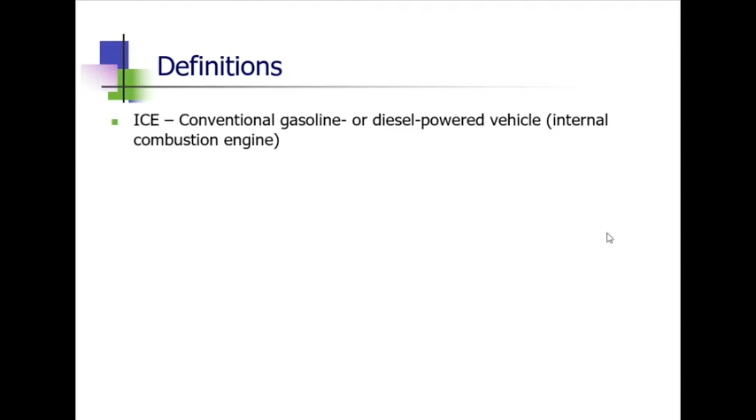The first definition is what we call ICE, internal combustion engine, and that essentially refers to the vehicles that we're all familiar with now, either gasoline or diesel powered. A hybrid vehicle is one that has both an internal combustion engine and one or more electric motors, and the motors are supplied with battery power.

One of the things that makes hybrids complicated is there are a lot of options. The simplest one is what's called a micro hybrid, and that uses the same kind of battery that is commonly found on regular gasoline vehicles now, just a 12-volt simple battery. It doesn't use a lot of electric power, and essentially it will just help you with start-stop of your engine and what we call regenerative braking, so that when you put on your brakes in a car, as your car is slowing down, instead of just generating heat from all that friction, you're actually using the vehicle to essentially run the generator in the vehicle in the reverse direction, or the motor, which generates electricity.

So whenever you step on the brakes, you can generate some electricity that helps keep the battery charged.

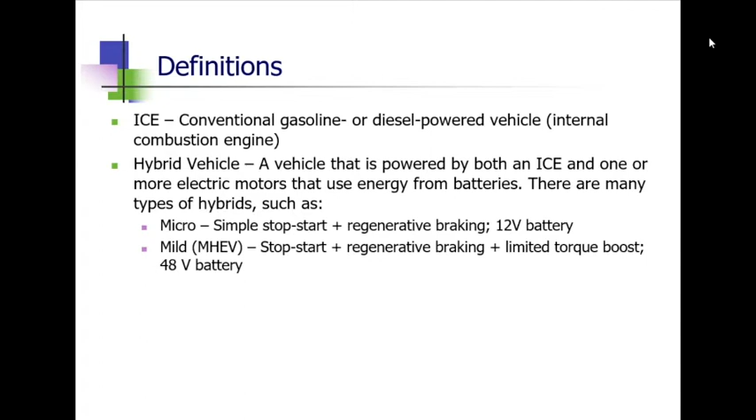A mild hybrid, which there are a fair number of on the market now, has stop-start, regenerative braking, and also what we call a limited torque boost, meaning if you need to pass, accelerate, or do something requiring a momentary boost from an electric motor, we can add that. That doesn't use a lot of power either. It can use a 48-volt battery, which very soon most vehicles will come with, since even on conventional cars there are so many electronic gadgets and controls that automakers need more voltage to keep everything running.

A full hybrid does everything I've already mentioned, but also has the ability to run on the battery alone, which takes an even larger battery. But a full hybrid still does not have the ability to plug in and recharge the battery from an external power source. You still need to use your gasoline engine to essentially provide power to recharge the battery.

The final type, and the most versatile and really the best of the hybrid features, is the plug-in hybrid. It does everything I mentioned, but in addition you have an electric plug, so you can charge your car at work or in the evening when you get home, and it has a much larger battery. Obviously, the plug-in hybrid costs a lot more than a micro hybrid. You save a lot more CO2 and get a lot more benefit, but you pay for that with the higher cost.

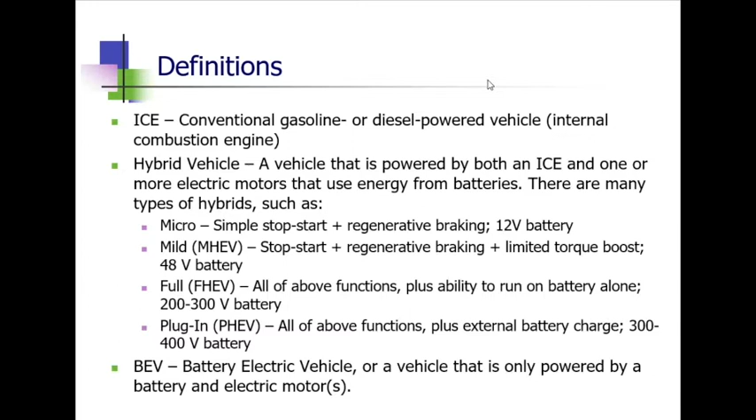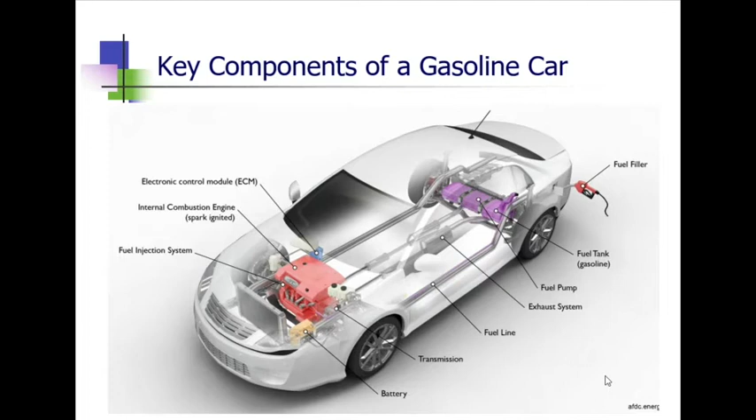So as you can see, going to the hybrid option, even though it gives you some fuel and CO2 savings, comes at quite a cost. The reason hybrids are so popular now is that full electric vehicles, which we'll see next, don't have the driving range a hybrid has—full electric can't take you as far as you want to go. So the hybrid has electric power but relies on backup gasoline power so you don't have to keep going to a service station or charging your battery.

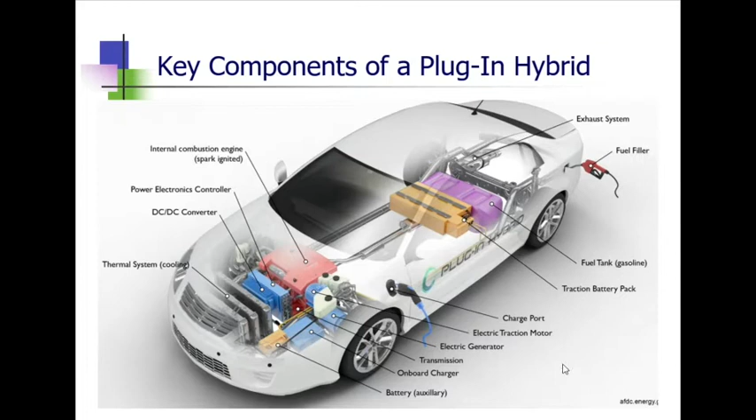So again, the biggest problem with electric cars—there are still many—is really the driving range. Most people, especially on a long trip, can't rely on an electric car. The other problem is the infrastructure. At least in the United States, you cannot always count on having a charging station available if you travel across the country, whereas you can always find a diesel or gasoline station. Over time, the infrastructure will improve, and the range and ability of full electric cars to go long distances will certainly improve as well.

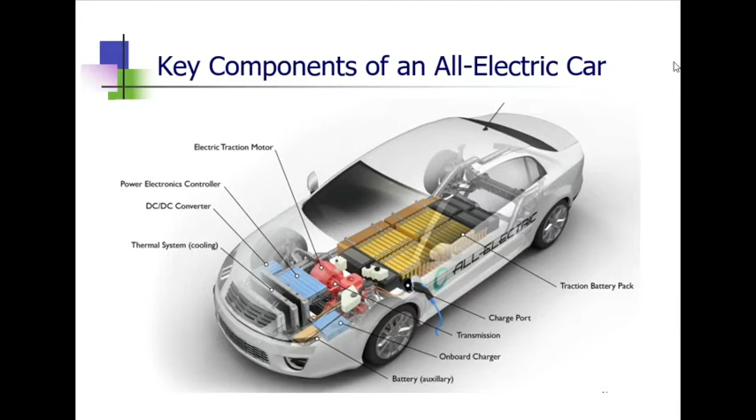You can also have the P1 position, where you have a motor that's after your engine, and this can be used to give what we call that torque boost if you need some extra power. The P0 and P1 type of hybrids really don't need any different lubricants than what you would find in a regular gasoline vehicle, so those are not of any real significance for the lubricant market.

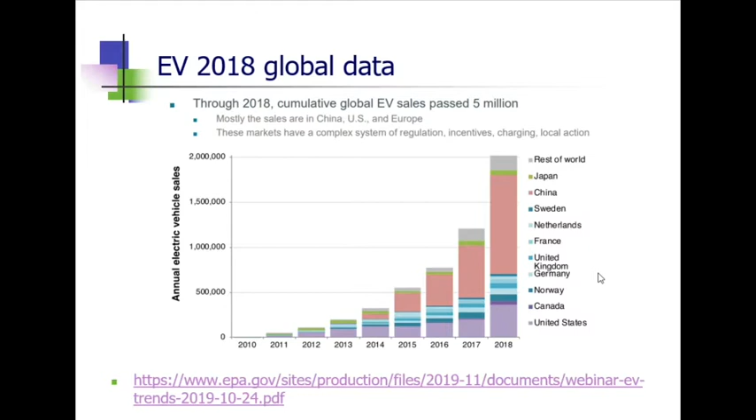People still don't really know how fast the market will grow. Even if we look at the poll that we took at the beginning of this webinar, it was fairly equally split between people saying within 5 years or within 10 years, we would see a sizable number of electric vehicles. But even within those time frames, I haven't seen any credible predictions that said electric vehicles will be the dominant vehicle on the road.

Certainly full electrics will not be dominant, but the hybrid electrics have a much better chance of gaining more market share, again largely due to the range that the vehicle can travel. This would be especially true for the commercial truck market. In order to power those large tractor trailer trucks on very long routes, it would be difficult to do that with just electric motors. They'll probably remain diesel powered for many years to come.

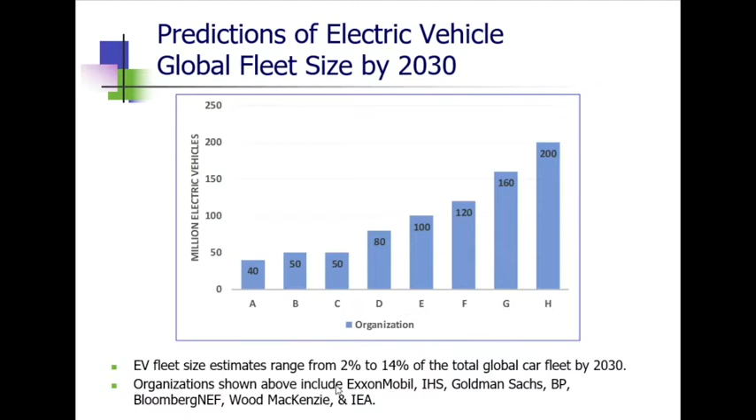So if we start seeing more electric vehicles, what will be the effect on engine oil consumption? Right now, because EVs are such a tiny fraction of the global population, there's not much impact that we're seeing now. In fact, in a region like Asia, notwithstanding this current virus pandemic, you would be seeing growth in lubricating oil sales.

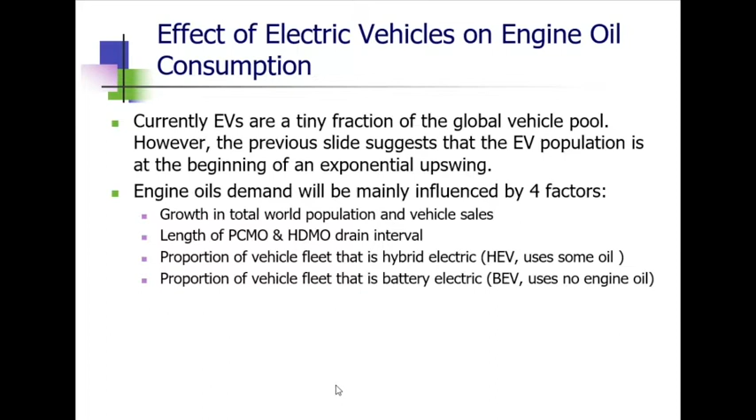If you look at what factors go into engine oil demand, the growth in world population and vehicle sales will certainly increase demand, and that's one of the reasons why Asia in particular is going to see growth in lubricant sales for years to come.

The length of the drain interval will certainly influence sales, because the longer you can go without a drain, the less lubricant will be sold. The proportion of the fleet that's hybrid electric will have an impact, because the hybrids will use some oil.

If you remember the picture of the plug-in hybrid, it still has an internal combustion engine. In general, that engine is smaller. You don't need as large an engine. It will use less engine oil, and it will need a specially designed engine oil. I can talk about that later. It doesn't have to be a custom oil, but certainly if you want optimum performance, customizing the engine oil will help.

And then finally, the real factor that will drop lubricant sales is if we go to full battery electric vehicles. Those vehicles use no engine oil, and that would have a serious impact on lubricant sales.

Looking at where the fleet is expected to go by the year 2040, there are going to be 1.5 billion cars on the road. So there certainly would be a large market, and the only question will be what percent of those are battery electric. A good guess could be anything from 20 to 40% of the population at optimistic scenarios would be battery by that point.

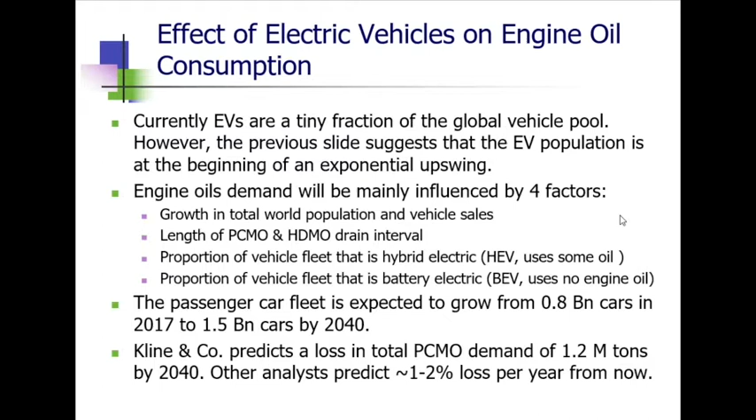So let's look at what types of fluids we'll need for hybrids and for the full or all-electric vehicles. All of the vehicles out there, including the current internal combustion engines, they all need cooling fluids or coolants. And the hybrid gas engine still needs to be cooled.

But now we have new factors. The batteries and motors, they need cooling. Certainly many car designs now are actually putting in separate cooling systems for both batteries and motors. This is obviously expensive, and people would prefer a better solution, and we'll talk about that in a little bit here.

Greases will still be in demand, and certainly the electric motors will use grease, and you still have wheel bearings on the car, as well as steering systems. Most of these greases will be, if not sealed for life, then have very, very long change intervals. That's one of the areas where I mentioned that if you don't have the factory fill for the person making a motor or for people making wheel bearings, there's probably not going to be a lot of demand in the automotive market for grease.

All of the hybrid vehicles will need engine and transmission lubricants, and all of the hybrids in general will have the same types of transmissions that you see now in the market. If you have a hybrid vehicle, because you still have a gasoline engine connected, you will still have a choice of an automatic transmission, a dual clutch transmission, a continuously variable transmission, or even a manual transmission. All of those will use the same types of lubricants we have now, with some exceptions that I'll get into a little bit later.

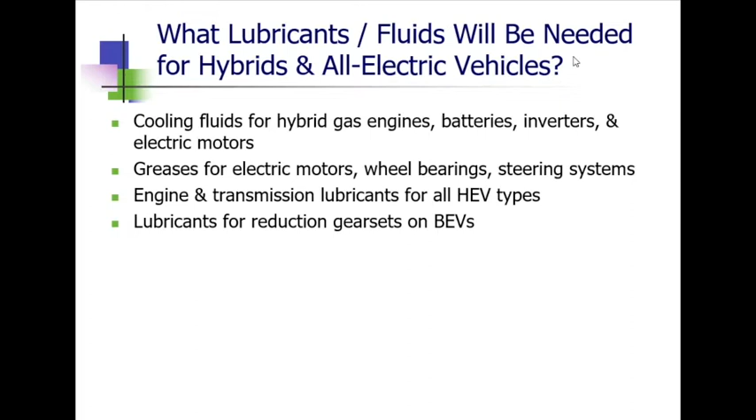So even though there's no transmission in the traditional sense, there will be a gearbox, and if the vehicle has a differential, you will also need some type of differential lubricant, which is this next bullet point here.

In general, hybrid and battery electric vehicles will use lubricants that are customized for that operation. The biggest thing people look for in electric lubricants is whether or not the motor is actually in contact with the lubricant. Let me explain what that is here.

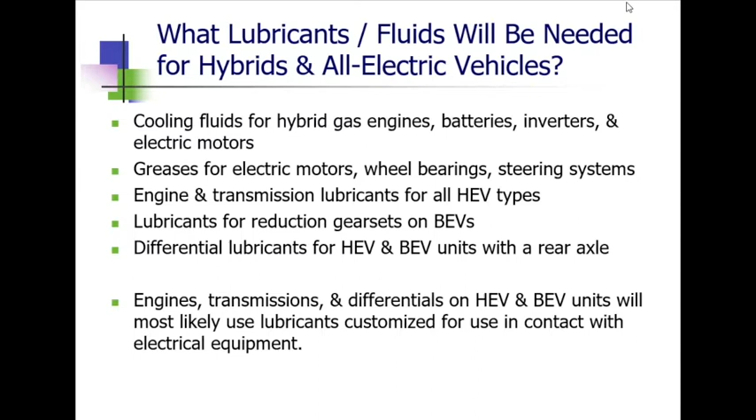So in this type of scenario, you want to have a lubricant that is compatible with electrical equipment.

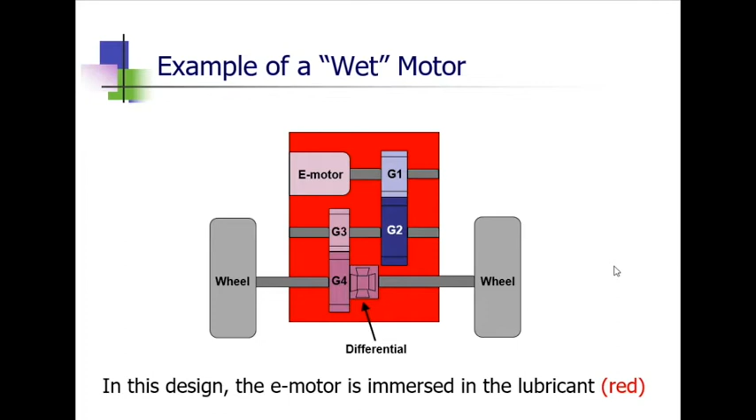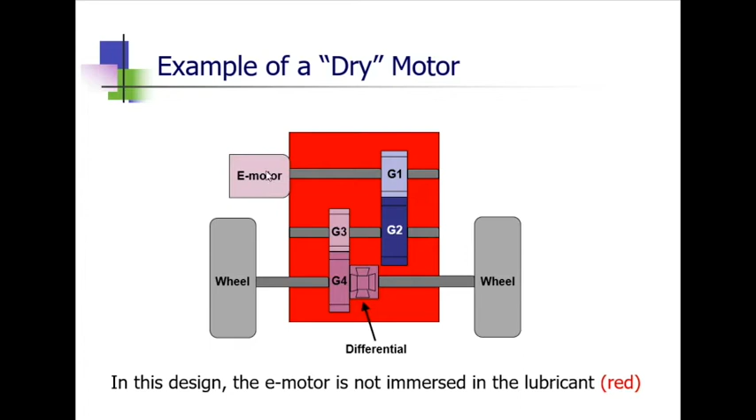Now let's look at performance needs if you had a wet gear set versus a dry one. If the gearbox is wet, you really need to worry about the electrical properties of the lubricant—electrical conductivity and what we call the dielectric breakdown voltage are important properties. If you don't meet certain parameters with those properties, you could have some serious problems with your vehicle.

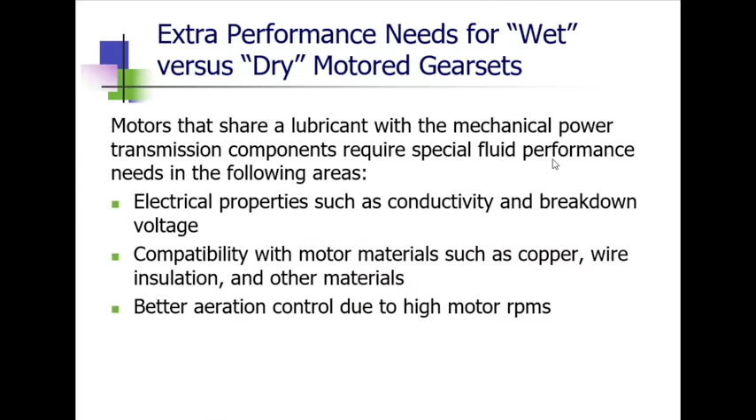We have a lot of new materials when a motor is introduced—a lot of copper that's exposed, insulation wire, and other materials such as magnets. We need much better aeration control because the motor spins at a much higher RPM than a typical internal combustion engine. Finally, heat removal is highly desired, so you want to customize the lubricant to get maximum heat removal.

Finally, oxidation tends to increase electrical conductivity—you create charged particles and molecules when you oxidize an oil, which increases the lubricant's ability to conduct charge. With enough oxidation, you could actually short circuit the motor because you're conducting electricity through the oil. At this point in time, oxidation control doesn't seem to be an issue, but it really needs to be evaluated with more testing, because we don't have enough experience yet to see how severe conditions could get, and with certain types of additives and base oils, how much oxidation could increase the conductivity.

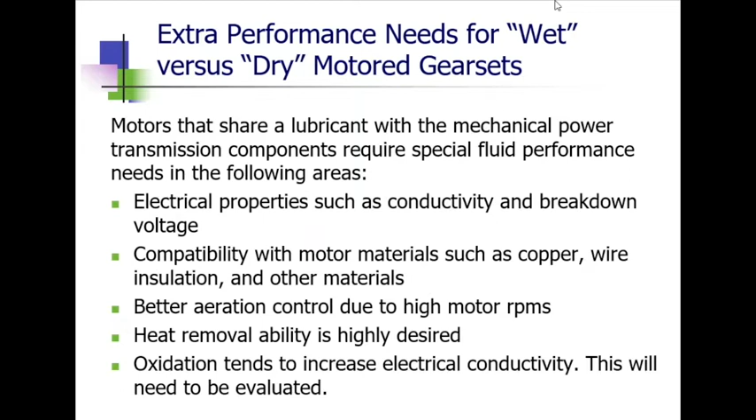Essentially, you can measure it fairly easily. The units typically used are picosiemens per meter, sometimes per centimeter. The interesting thing about conductivity is that you don't want it too high, because you could short circuit your motor, but you also don't want it too low. Many people may think, oh, we should have no conductivity at all, that it would damage your motor or make your whole car a charged item.

But really, you do want some amount of electrical conductivity, because if you don't have conductivity, you can build up static charge. Many people have had this experience in cold weather, if you're wearing a sweater and touch a metal object, you may get a little shock, and that's because of a buildup of static charge.

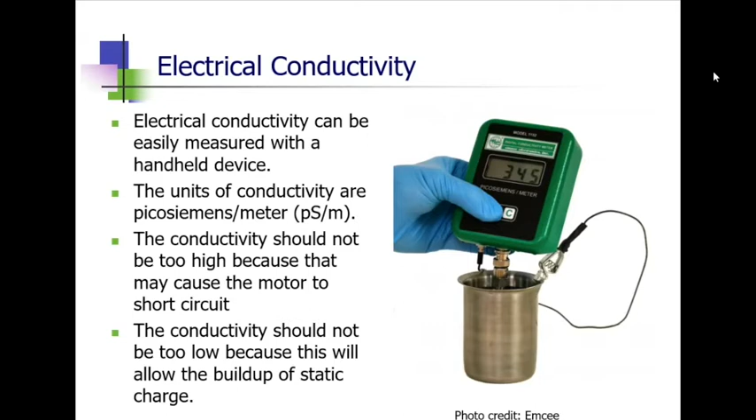Base oils are typically about 3 to 5 orders of magnitude, so in the 10,000 range, times less conductive than finished lubricants. The main reason for this is that most of the conductivity you see in an oil comes from additives, because many additives have some type of charge. They're polar species, may even be fully ionized, but in general they do have some dipole moment or charge separation in the molecule, and that helps conduct electricity through the oil.

There have been a lot of studies recently looking at designing additives so you can affect the conductivity. Afton recently published a paper where they looked at many different dispersant additives, with a range anywhere from 300 to 6,100 picosiemens per meter for these different materials.

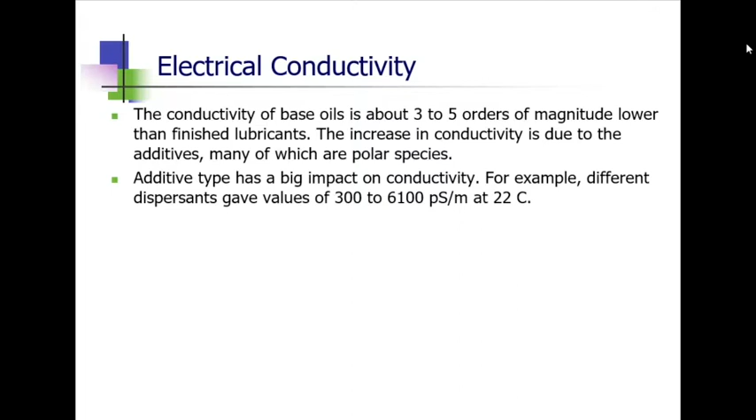So obviously, if you're designing a lubricant for an electric vehicle, you want to tend towards additives that don't conduct charge as much, down at the 300 to 1,000 range instead of up at the 5,000 or 6,000 range. Part of that is also because even if you start with a fresh oil that has very low conductivity, as the oil is in service, the conductivity generally increases, not only from oxidation, but temperature increases conductivity, and moisture will also increase conductivity.

For guidelines on where to design a lubricant, if you can make an oil that has more than 400 picosiemens per meter, you don't have much chance of static discharge, but you want to keep the conductivity below 10,000, so that as the oil ages and it increases, you still don't get to a danger point on conducting too much charge through the oil.

So right now, lubricants are good insulators. If you're careful about your formula design, you can control the electrical properties and make sure that if you have a motor in contact with a lubricant, you're not going to short circuit that motor.

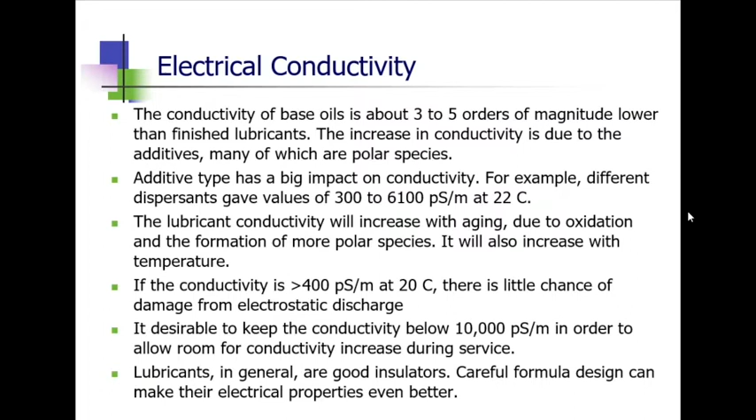The other factor which is important, and many of you may be familiar with, is electrical transformers on power lines. They're filled with an oil often called insulating oil or transformer oil. One very common test in the industry uses two electrodes immersed in the lubricant, and you keep increasing the voltage on these electrodes until you reach a point where the voltage gets high enough to cause a spark or charge to pass between those two electrodes, sort of like lightning in the sky. If you get a big enough buildup of a charge difference, you will eventually cause an electrical discharge, and this can be quite dangerous inside a vehicle.

This dielectric breakdown test will measure how much you can increase the voltage on your system before the oil essentially breaks down. There are lots of ways to measure this, including an IEC test as well as many ASTM methods. The warning limits and recommended limits actually depend on what test you're using. Especially ASTM D3300, that's a very different type of test. It uses an impulse voltage, so instead of just increasing the voltage continuously and keeping it at a fixed level for a period of time, you cycle the voltage, and that has a very different breakdown limit.

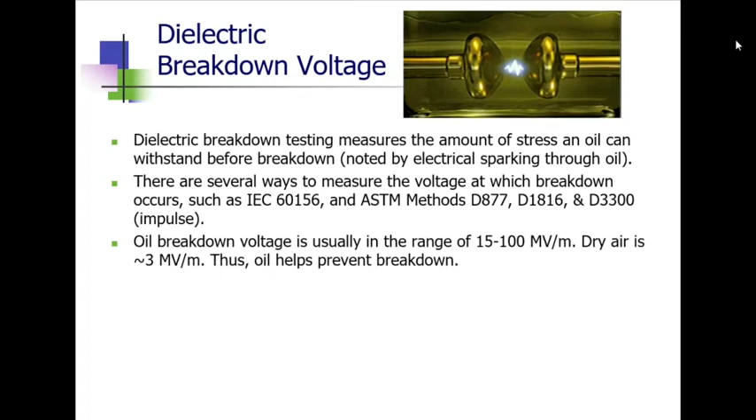Oil typically breaks down in the range of 15 to 100 million volts per meter, so it takes an awful lot of voltage per meter to cause a discharge. Obviously, if the distance between your charge surfaces is much smaller than a meter, which it would be in a vehicle, you don't need as many volts. You may be in the 1,000-volt range in a typical vehicle. But dry air will break down at 3 million volts, so actually oil is a better insulator than air, which wouldn't seem obvious to many people, but it's because of the dielectric breakdown potential. Air is a lot worse in that regard. Many people have a spec of 20 million volts per meter for the oil, it has to be better than that, but it depends on many variables.

If you have moisture, other conducting contaminants, dissolved gases even can cause the voltage to decrease, so you have to be careful of those things. Right now, dielectric breakdown doesn't seem to be a problem, but certainly people will be monitoring it, and it's possible you may have a design that enhances this phenomenon. But right now we have not seen any major issues, because of the high voltages you need, you typically wouldn't be able to generate that in a vehicle. Transformers are completely different, because there you may have step-down transformers where you start at very high voltages and get it down to essentially household voltage. So there you have a lot more concern about dielectric breakdown.

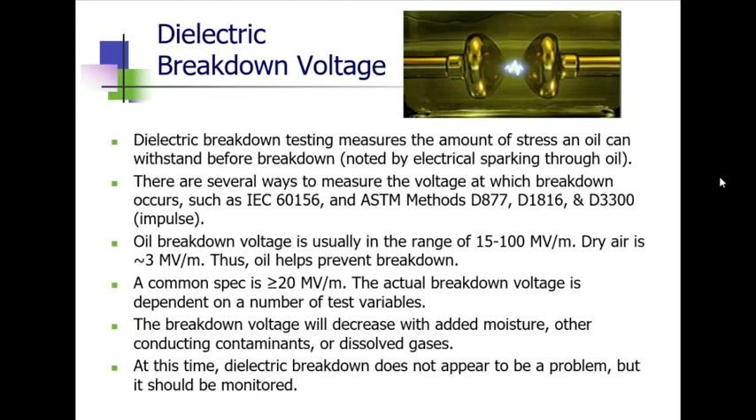So you need excellent protection against copper corrosion, and all of the additive companies are working on this, but Afton and Lubrizol in particular have published many papers already on new tests they're developing. Also, very interestingly, Afton has shown that vapor phase corrosion can actually lead to field failure in a vehicle. By vapor corrosion, what we mean is that the motor wires may not be in direct contact with the lubricant, but they may be in a space where lubricant vapor can reach the wires, and they found that there are actually differences in the amount of corrosion depending on whether it's in the vapor or the liquid phase.

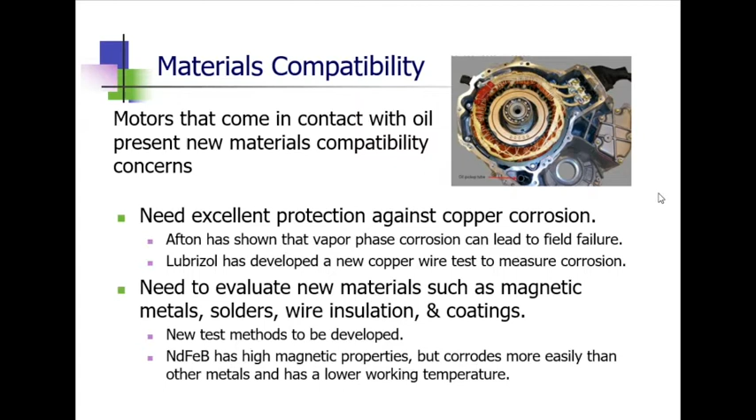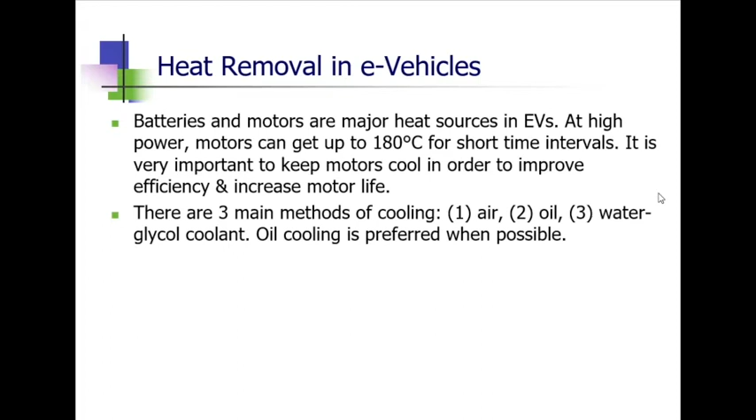Now let's look at heat removal. Batteries and motors can generate a lot of heat, and if you're using high power, you can actually get up to 180 Celsius for short times. So in order to both improve the motor efficiency and improve the motor life, it's important to keep the motor cool. I mentioned earlier that you could use an external cooling system like water or glycol in a heat exchanger, but if you can use oil, that has some advantages. So you can either use air, oil, or water glycol cooling, and the oil is preferred when it's possible.

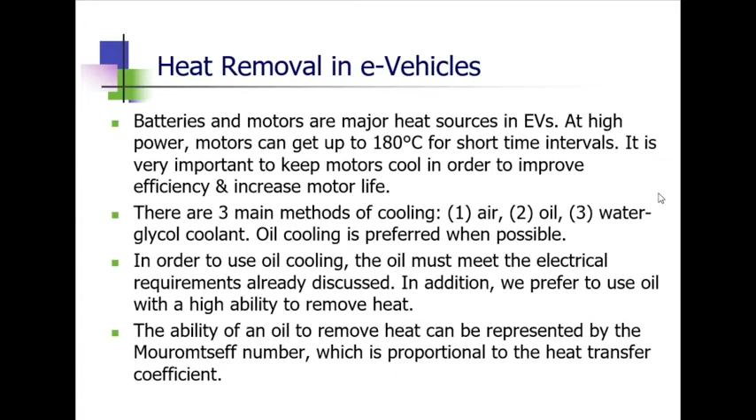So in order to use the oil, you've got to meet these electrical properties I've already discussed, but also we want to use oil that can remove heat rapidly. And in order to evaluate that, we've got a number that's been termed the Mouromtseff number. It's really a heat transfer coefficient, but it allows you to get a feeling for how much heat can be removed.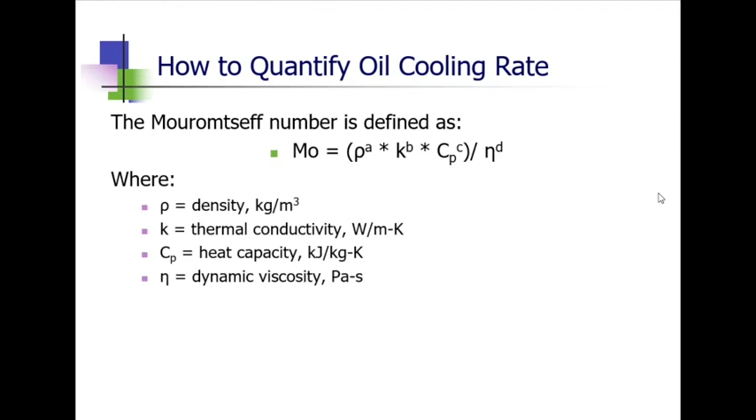The number is defined in this way, and this will be the only equation you see in this talk, where you've got the density raised to some power times thermal conductivity times heat capacity divided by viscosity. Essentially for any given oil at a certain temperature, the higher that number is, the more heat you are capable of removing. So what you'll notice from this formula is that, and this should not be a surprise, if heat capacity, the CP, goes up and if thermal conductivity goes up, you are removing more heat. That's what these numbers measure.

So if your M number goes up, because these are high, you're removing more heat. But the very interesting thing is that it's inversely proportional to viscosity. The lower the viscosity, the better, the easier it is to remove heat. And so what tends to happen is many fluids, the thermal conductivity and heat capacity improve as viscosity increases, but you actually don't want viscosity to increase. You want it to decrease to make the cooling more efficient. So in a sense, you have a trade-off between these properties.

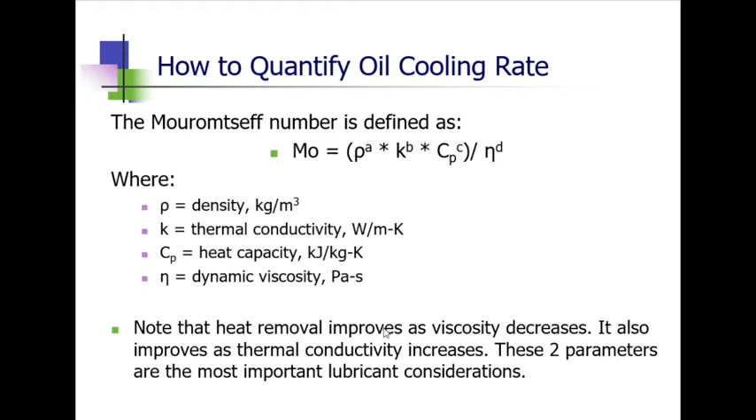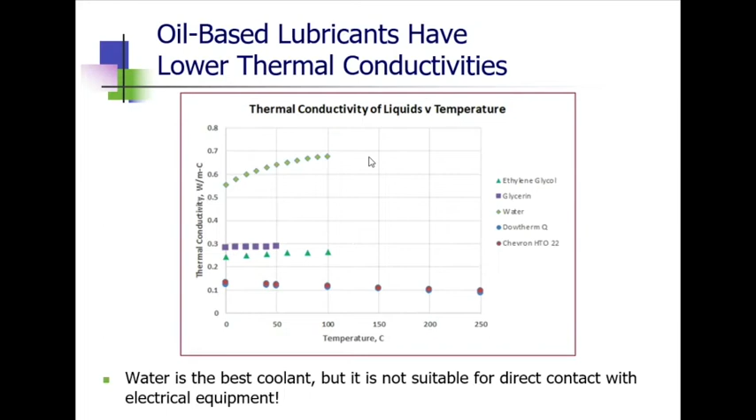Glycerin or ethylene glycol, this is a standard coolant material, they're pretty good at removing heat, but certainly not as good as water. The big problem is, as we would all know, water is great for cooling, but you can't really put it in contact with electrical equipment. So if you want to use glycol or water cooling, you need to build essentially a heat exchange system. You need piping, you need a way to have a radiator to remove the excess heat, and that's expensive.

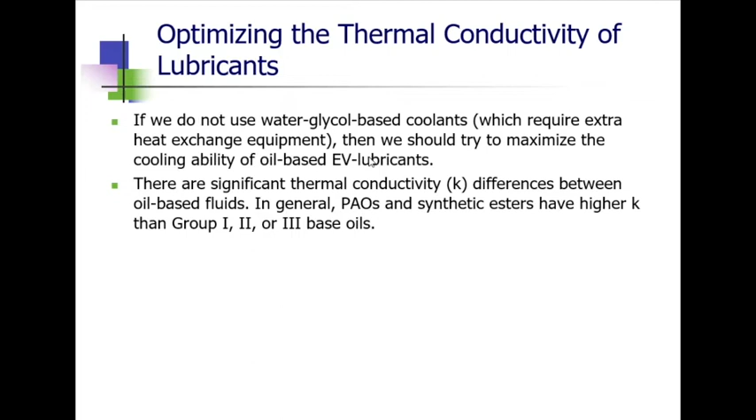The ability of your oil to remove heat - there are definite differences between different oils. In general, PAOs and synthetic esters have better thermal conductivity than the standard group 1, 2, or 3 base oils. So here's an example: PAO has a conductivity of 0.147. If you compared it to a standard mineral oil, it'd be 0.123. So the PAO is about 20% better at removing heat.

And I think you'll find that most of the e-fluids that'll be developed in the future are going to use base oils that have better heat removal ability.

I mentioned before that there is a trade-off between getting higher thermal conductivity and low viscosity, that they move in opposite directions. And so far, from at least stuff that I've seen reported in the literature, it looks like viscosity is really the most important thing for good heat removal. But if you can optimize your conductivity and heat capacity, that definitely helps. But the lower viscosity is important. The big warning signal is that obviously if viscosity is too low, you may run into wear and fatigue problems on your equipment. So you have to balance how low can you go with how much heat can you remove before you cause wear or fatigue.

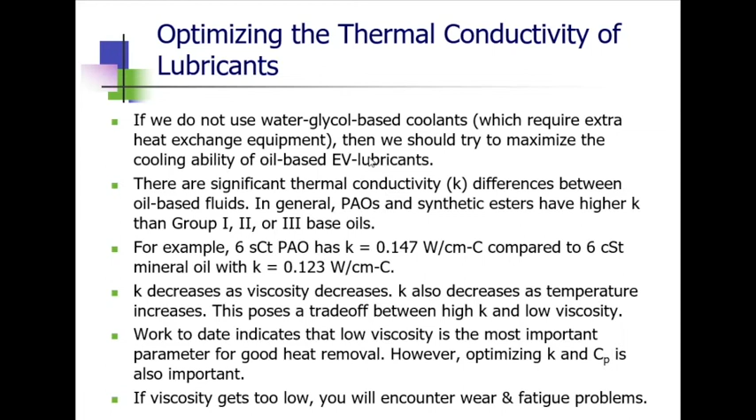So now let's look at marketing fluids. There are a lot of companies now that have made announcements. I've found doing a lot of internet searching that many people are not publishing any data on their new products, not even really advertising them. And I think really part of the reason is at this point, the markets are very small, so fluid sales are small.

Longer term, and I think many of you said this in the introductory poll, it's good to have plans in place to think about what would you do if you needed to get involved with electric vehicle fluids. You certainly need to be prepared for hybrids and full electrics being more part of the whole vehicle population. And again, a lot of the action's going to be at the factory, not in the aftermarket. So other than for a hybrid engine oil, most drain intervals will be very long.

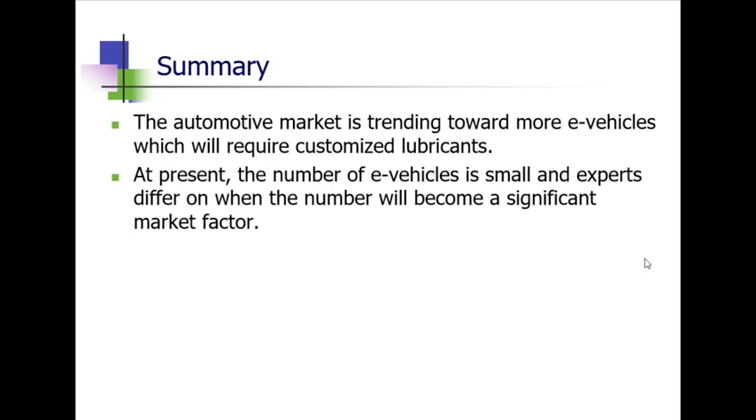We've talked about key properties you need when making a custom lubricant: electrical conductivity is very important, as well as the ability to remove heat. The interesting thing is that additive chemistry has a big impact on conductivity of electricity, whereas removal of heat is much more determined by base stocks. So you need a balance between the proper base fluids and the proper additive package to have the best performing electric vehicle lubricant.

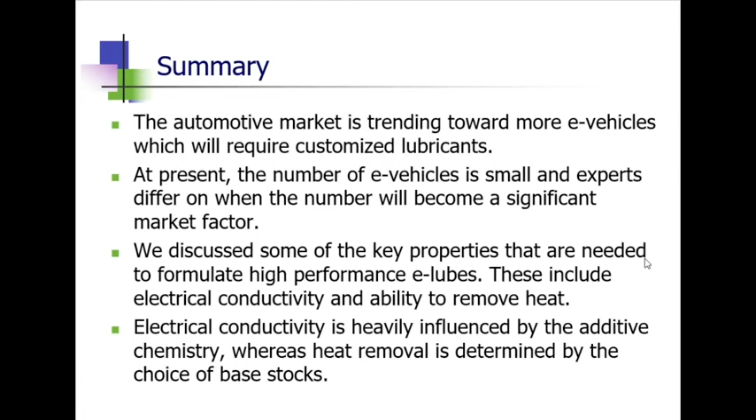So that wraps it up for me, and I'm very happy to take your questions or comments at this point.